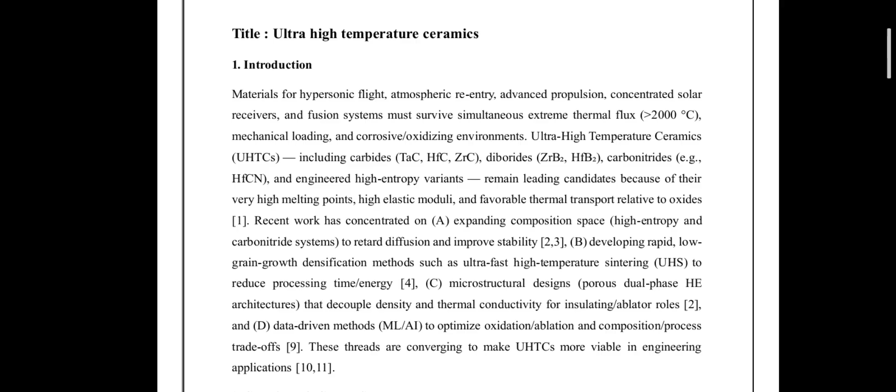Together, these advances are transforming UHTCs from laboratory curiosities into realistic engineering materials with growing relevance for next generation aerospace, energy, and extreme environment systems.

Now we will study the chemistry and crystal structures. So let's start with the chemical bonding.

Ultra high temperature ceramics exhibit a hybrid bonding framework dominated by strong covalent metal-nonmetal bonds between early transition metals and light elements such as carbon, boron, and nitrogen. This covalent bonding is supplemented by partial ionic character and metallic metal-metal interactions, creating a balance between stiffness and transport properties.

The strong directional covalency suppresses atomic diffusion and maintains mechanical rigidity at extreme temperatures, while partial d-band occupation enables moderate electrical and thermal conductivity, unlike conventional oxide ceramics.

When we talk about the electronic structure, density functional theory calculations reveal a pseudo gap in the electronic density of states near the Fermi level for many ultra high temperature ceramics.

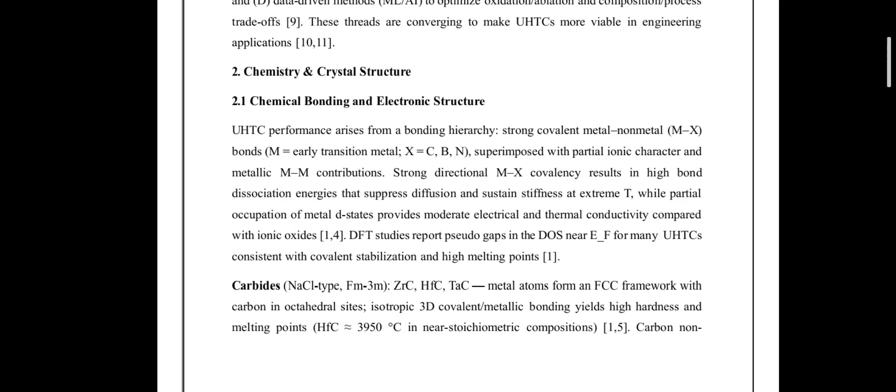These pseudo gaps indicate covalent stabilization and correlate strongly with high melting temperature and thermodynamic stability. This electronic structure explains why ultra high temperature ceramics retain stiffness and phase stability even near 3000 degrees Celsius. Now we will discuss the carbides.

Carbides of transition metals such as zirconium carbide, hafnium carbide, and tantalum carbide crystallize in a cubic NaCl type structure, with the metal atoms forming an FCC lattice and carbon occupying the octahedral interstitial sites of that FCC structure.

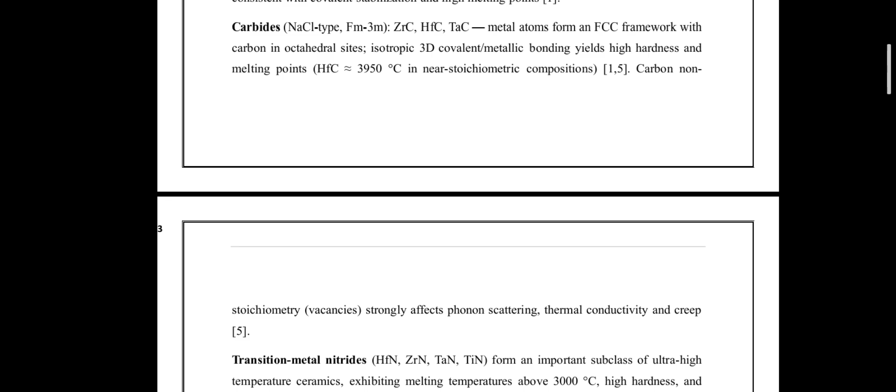This structure produces isotropic three-dimensional bonding, leading to extremely high hardness and melting point, with hafnium carbide approaching 3950 degrees Celsius in nearly stoichiometric composition. However, carbon vacancies are common and strongly influence thermal conductivity, phonon scattering, and high temperature creep behavior.

Second is the transition metal nitrides. These form a related ultra high temperature ceramic subclass with melting temperatures above 3000 degrees Celsius, high elastic moduli, and mixed covalent and ionic bonding.

Compared with carbides, nitrides generally show higher thermal and electrical conductivity and improved thermal shock resistance. Their key limitation is poor oxidation resistance above 1000 to 1200 degrees Celsius, so they are typically used in composite or multi-phase ultra high temperature ceramics.

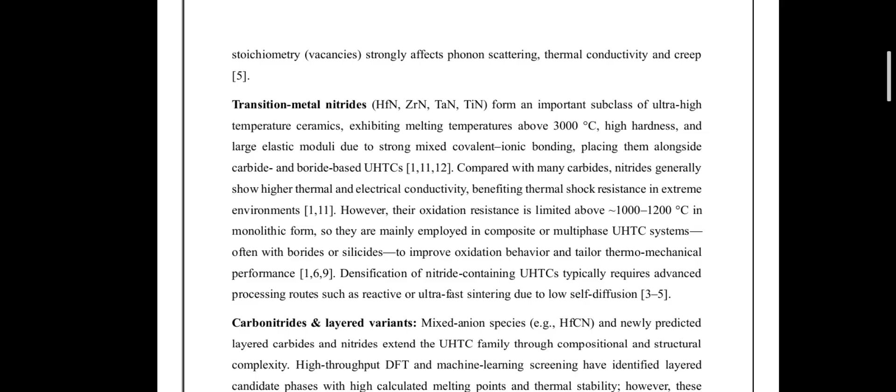Densification of nitride-containing ultra high temperature ceramics requires advanced processing methods due to the extremely low self-diffusion.

Next is carbonitride, an emerging mixed anion system like hafnium carbonitride, which allows tuning of bonding and defect chemistry. High throughput DFT and machine learning studies have predicted layered carbide and nitride phases with high thermal stability. However, most of these remain computational predictions and require experimental validation.

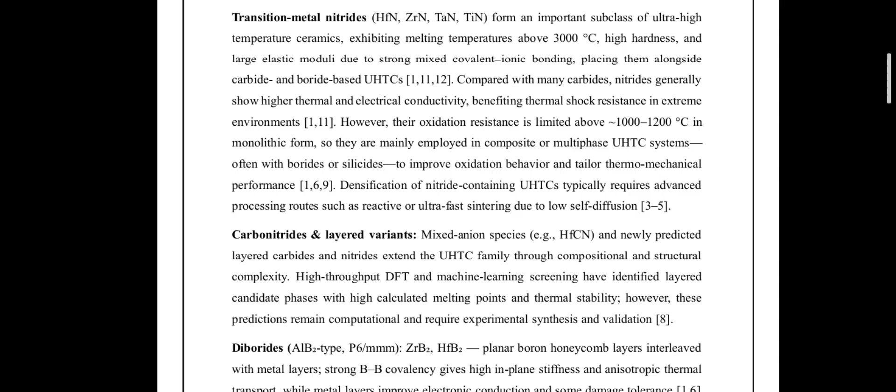The other class is the diborides. The diborides, including zirconium diboride and hafnium diboride, adopt a hexagonal AlB2 type structure consisting of a boron-rich honeycomb layer separated by a metal plane. Strong boron-boron covalent bonding results in very high in-plane stiffness and anisotropic thermal transport, while the metallic layer enhances electronic conductivity. The AlB2 type structure of diboride can be clearly seen in that figure.

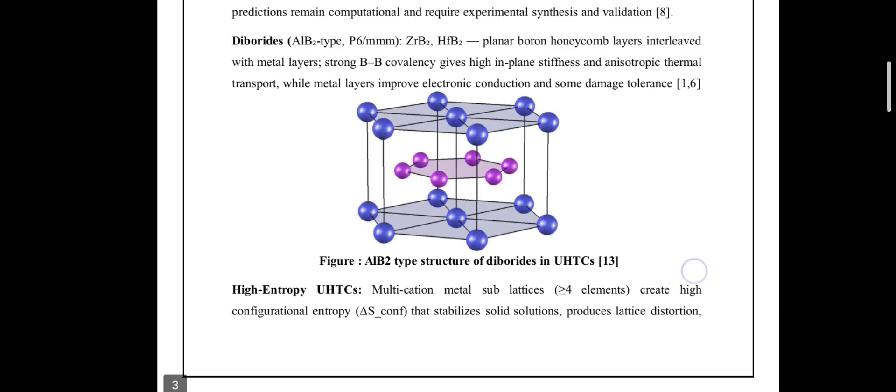Next are the high entropy ultra high temperature ceramics. These incorporate multiple metal cations on a single sublattice, increasing their configurational entropy and disorder. This leads to lattice distortion, suppressed diffusion, and improved phase stability, which can enhance oxidation resistance and grain growth control. Despite their promise, processing and phase stability windows remain challenging in high entropy ultra high temperature ceramics.

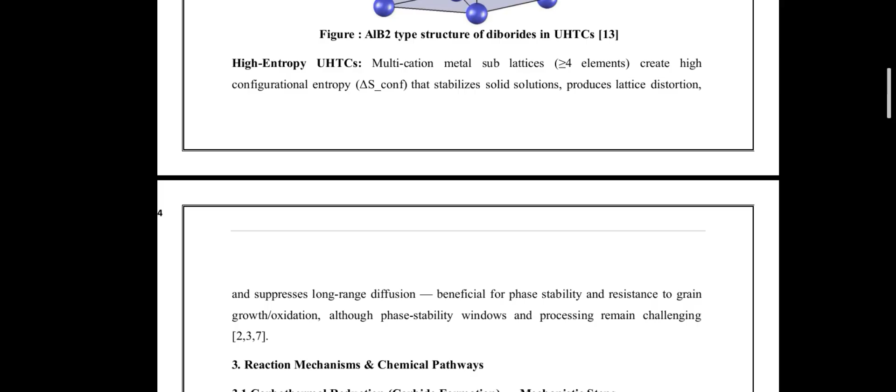Let's move toward the reaction mechanisms and chemical pathways. First is carbothermal reduction carbide formation. Carbothermal reduction is a primary synthesis route for transition metal carbides from oxide at ultra high temperature. The process begins with the adsorption of carbon, either solid carbon or carbon derived from precursors, onto the surface of metal oxide particles.

At elevated temperature, carbon extracts oxygen from the metal oxygen lattice, producing carbon monoxide gas. This removal of oxygen reduces the metal cation, enabling the formation of metal-carbon bonds. The reduced metal atoms then diffuse locally and react with available carbon to form carbide nuclei. As the reaction progresses, these nuclei grow through solid state diffusion and surface reaction. Simultaneously, carbon monoxide gas evolves and escapes.

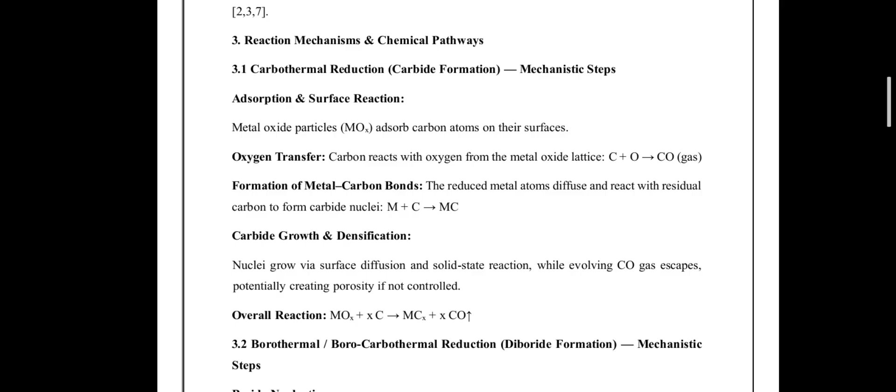If gas evolution is too rapid or diffusion is limited, residual porosity can remain, making atmosphere control and heating rate critical. The overall reaction can be summarized as: metal oxide plus carbon, such that oxygen is eliminated and the metal reacts with carbon to form a metal-carbon bond, while the carbon and oxygen are eliminated as carbon monoxide gas.

Next is the borothermal pathway for the formation of diborides. Metal diborides are commonly synthesized via borothermal or borocarbothermal reduction, typically using boron carbide as a boron source. Initially, the metal oxide reacts with boron to form diboride nuclei, while oxygen is liberated from the oxide lattice. Because boron alone is insufficient to fully remove oxygen, excess carbon plays a critical role, and oxygen is removed as carbon monoxide gas.

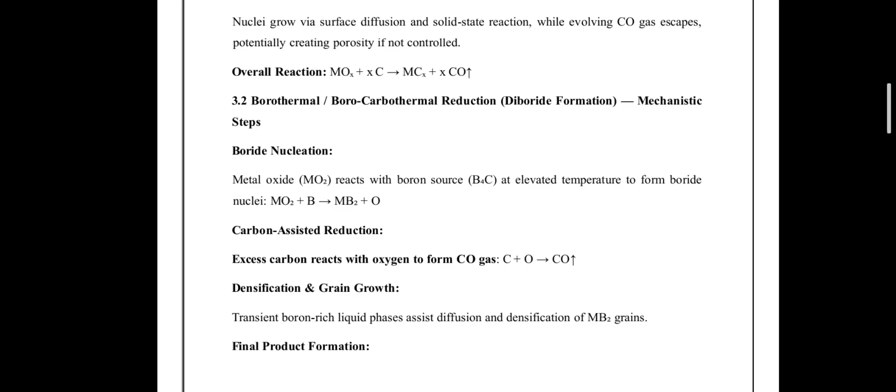At high temperature, a transient boron-rich liquid phase may form, significantly enhancing mass transport. This liquid promotes rapid diffusion, grain rearrangement, and densification of the diboride phase. The final result is dense MB2 grains, with carbon monoxide as the primary gaseous byproduct. The overall reaction is: metal oxide plus boron carbide plus carbon, such that the metal reacts to form the diboride, and carbon monoxide is eliminated as a byproduct. This pathway explains why diboride processing is more sensitive to carbon balance and temperature control than carbide synthesis.

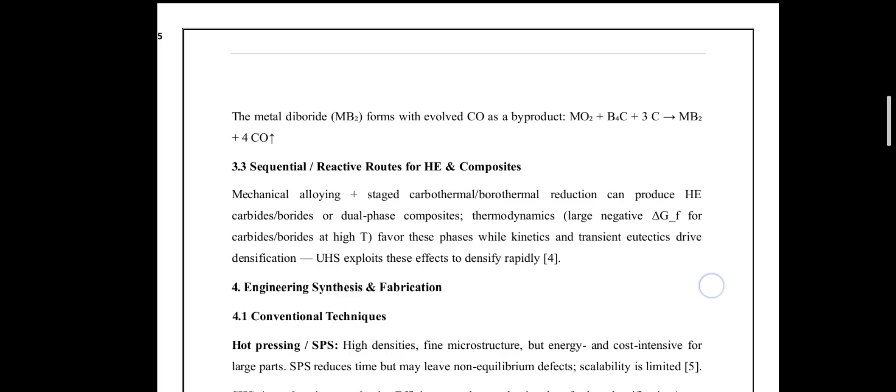Now we move toward reactive routes for high entropy and composite ultra high temperature ceramics, and reactive sequential processing. For high entropy ultra high temperature ceramics and multi-phase composites, a single step reduction is often insufficient. Instead, mechanical alloying is used to homogenize multiple metal oxides, followed by staged carbothermal and borothermal reactions. Thermodynamically, carbides and borides are strongly favored at high temperature due to their large negative Gibbs free energy of formation. However, densification is largely kinetically controlled.

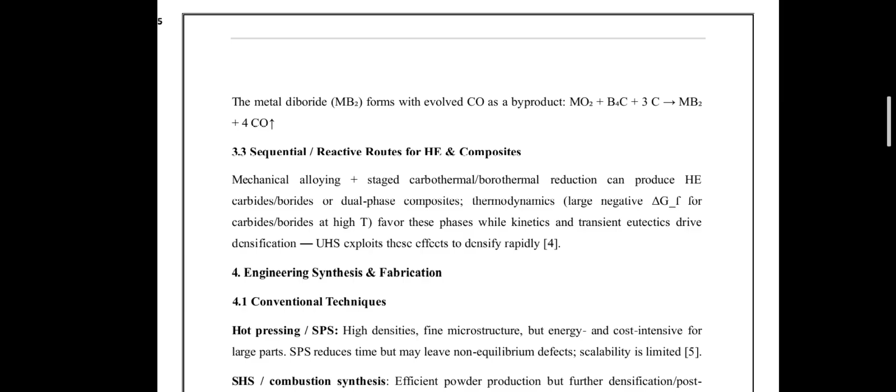Transient eutectic liquid phases accelerate diffusion and reaction rate. Ultra-fast sintering techniques, such as ultra-high heating rate methods, exploit this kinetic effect to achieve near full density before excessive grain growth occurs. After studying the different types, now let's move toward engineering synthesis and fabrication.

First is the conventional processing technique: hot pressing and spark plasma sintering. Both are the most established densification routes for ultra high temperature ceramics, applying simultaneous pressure and high temperature, enabling high relative densities and fine microstructure. Spark plasma sintering significantly reduces processing time due to rapid Joule heating and enhanced diffusion. However, it is energy intensive, expensive, and suffers from limited scalability for large or complex components. In addition, rapid heating can introduce non-equilibrium defects which may affect high temperature stability.

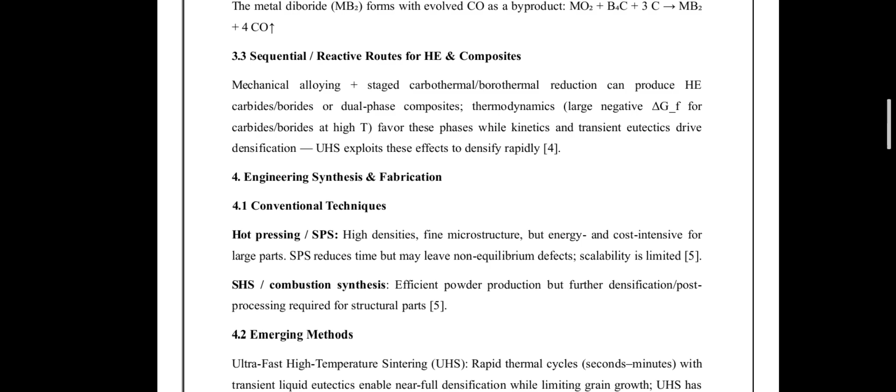Second is combustion synthesis. Self-propagating high temperature synthesis is an efficient route for producing ultra high temperature ceramic powders through highly exothermic reactions. While this offers low external energy input and rapid synthesis, the resulting products are typically porous, inhomogeneous, and require subsequent densification steps such as hot pressing or spark plasma sintering for structured applications.

Those were the conventional methods. Now we will move toward the emerging and advanced processing methods.

Ultra fast high temperature sintering employs extremely rapid thermal cycles, often on the order of seconds to minutes. These conditions promote the formation of transient eutectic or liquid phases, which dramatically enhance diffusion and allow near full densification while suppressing excessive grain growth. Recent studies demonstrate an entropy stabilized diboride composite processed by UHS achieving 90% relative density and nano hardness values approaching 27 GPa, highlighting its potential for advanced ultra high temperature ceramics.

Next is reactive additive manufacturing. This involves printing oxide or polymer derived green bodies which are subsequently converted into carbide or boride via carbothermal or borothermal reactions. Although still at an early development stage, reactive AM offers unique advantages, first, the ability to fabricate complex and graded geometries that are extremely difficult to achieve through conventional sintering routes.

Second is high entropy sequential synthesis. This requires engineered precursor chemistry and staged reduction pathways to achieve homogeneous solid solutions. Sequential synthesis allows control over phase formation, enabling the production of single phase high entropy ceramics or dual phase microstructures with tailored thermomechanical properties.

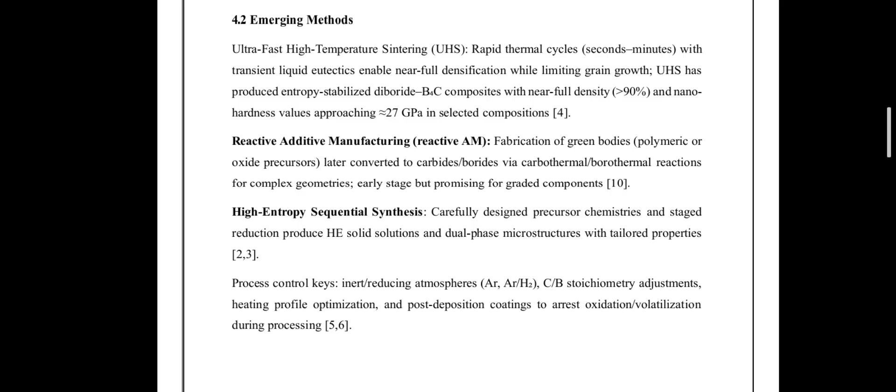Process control considerations we should keep in mind: successful UHT fabrication critically depends upon process control. This includes an inert or mildly reducing atmosphere to suppress oxidation and volatilization, precise carbon and boron stoichiometry to avoid residual oxygen or free carbon, optimized heating profiles to balance densification and grain growth, and protective coatings or sacrificial layers to limit surface degradation during processing.

So these were some fabrication and synthesis routes for ultra high temperature ceramics. Now we will move towards the properties.

First are the mechanical properties, hardness, and elastic response. Ultra high temperature ceramics exhibit exceptionally high hardness and stiffness due to strong covalent metal-nonmetal bonding and dense crystal lattice. For example, hafnium carbide shows hardness in the range of 20 to 30 GPa, while zirconium carbide is slightly lower at 18 to 26 GPa. This hardness originates from directional covalent bonding which strongly resists dislocation motion. Elastic moduli typically exceed 400 GPa.

In diborides, the AlB2 type layered structure leads to pronounced elastic anisotropy. Stiffness is significantly higher in the basal plane than along the C axis, reflecting strong in-plane B-B bonding.

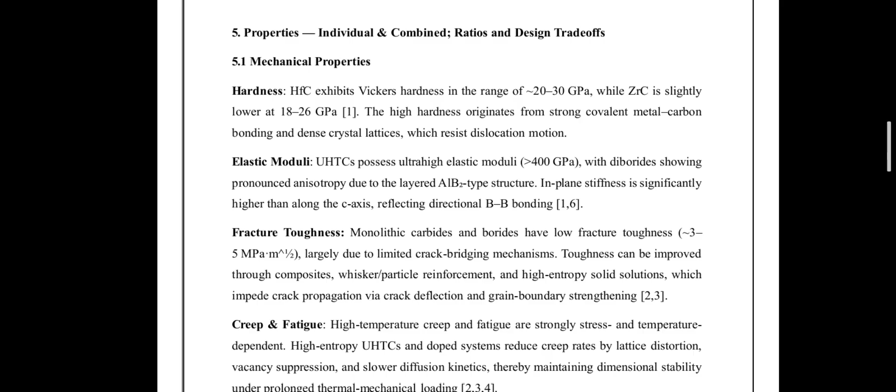Next is fracture toughness. Despite their strength, monolithic carbides and borides suffer from low fracture toughness, typically ranging from 3 to 5. This brittleness arises from limited plasticity and the absence of effective crack bridging mechanisms.

Toughness can be enhanced by composite architectures, such as particle reinforcement and high entropy solid solutions. This approach impedes crack propagation through crack deflection, grain boundary strengthening, and stress redistribution.

Next is creep and fatigue at high temperature. High temperature creep and fatigue are strongly stress and temperature dependent, governed primarily by diffusion controlled mechanisms. High entropy ultra high temperature ceramics show reduced creep rate due to lattice distortion, vacancy suppression, and slower atomic diffusion. As a result, these systems maintain dimensional stability under prolonged thermomechanical loading, which is critical for hypersonic and re-entry environments.

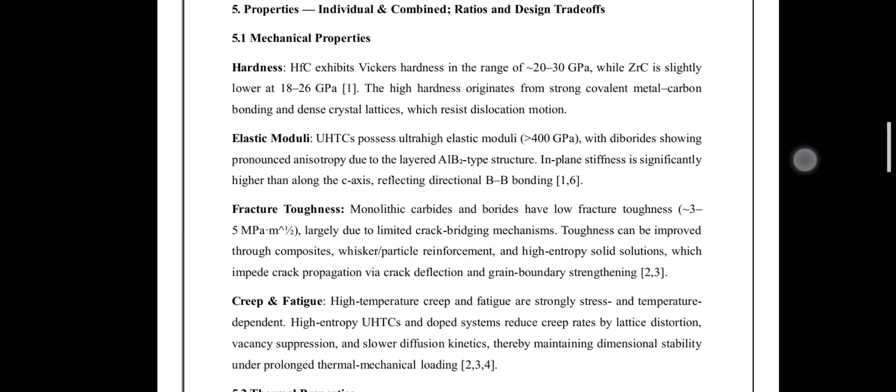Next are the thermal properties: thermal conductivity and anisotropy. Diborides such as zirconium boride and hafnium boride exhibit relatively high thermal conductivity, depending upon purity, porosity, and defect concentration. Their layered crystal structure produces anisotropic heat transport with higher conductivity in the basal plane than along the C axis. Defects, vacancies, and porosity increase phonon scattering, reducing thermal transport efficiency.

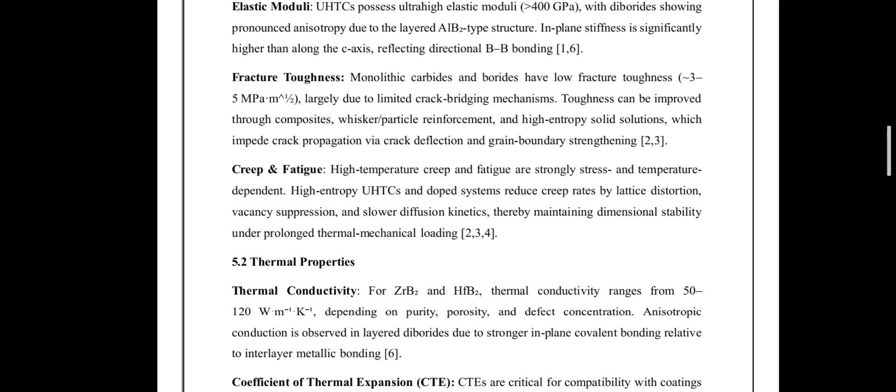Next, the coefficient of thermal expansion is a critical parameter for coating compatibility and structural integrity. Carbides are generally more isotropic, while diborides show moderate anisotropy, and CTE mismatch between ultra high temperature ceramics and substrates or coatings can generate severe thermal stress during heating and cooling cycles.

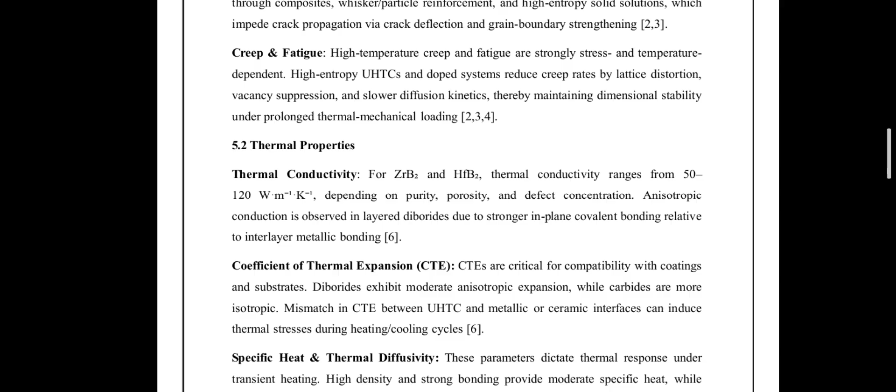Specific heat and thermal diffusivity govern the transient thermal response, while strong bonding yields moderate heat capacities, and defect induced phonon scattering reduces diffusivity, directly impacting thermal protection system performance.

Next is microstructure, the microstructure-property relationships involving grain size, phase, and porosity. Microstructure strongly dictates performance: fine, homogeneous grains enhance hardness and suppress crack initiation, while coarse grains may improve toughness through micro crack deflection. Dual phase and composite systems balance strength, toughness, and thermal conductivity. Porosity reduces modulus and conductivity but can improve thermal shock resistance in ablative and insulating components.

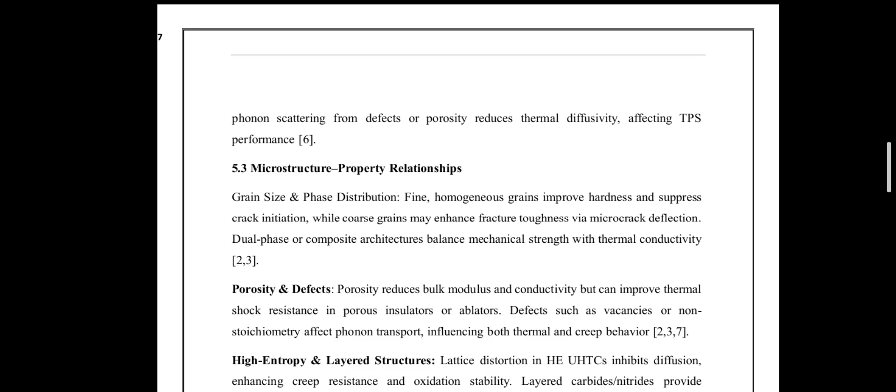Next are the high entropy and the layered structures. In high entropy, ultra high temperature ceramics, lattice distortion inhibits diffusion, improving creep resistance and oxidation stability. Layered carbide and nitride enable directional thermal transport, allowing engineered anisotropy for target high temperature applications.

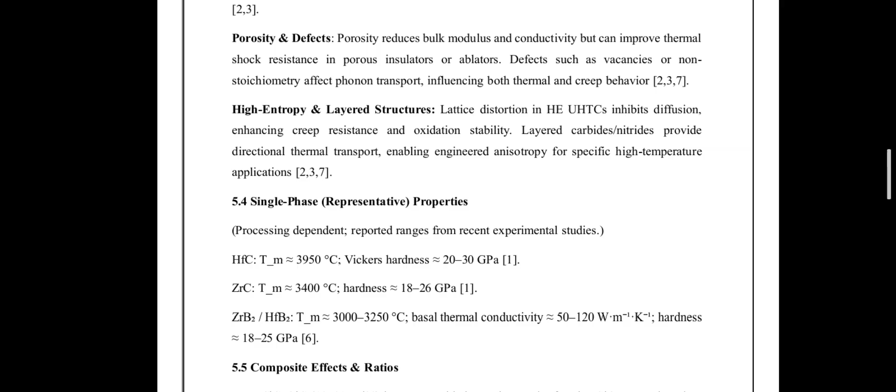Next is their representative single phase properties, processing dependent. There is a reported range. Melting point for hafnium carbide is 3950 degrees and their hardness is 20 to 30 GPa. Melting point for zirconium carbide is 3400 and the hardness is 18 to 26 GPa. For the borides, melting point is 3000 to 3250 degrees Celsius, thermal conductivity ranges from 50 to 120, and hardness 18 to 25 GPa.

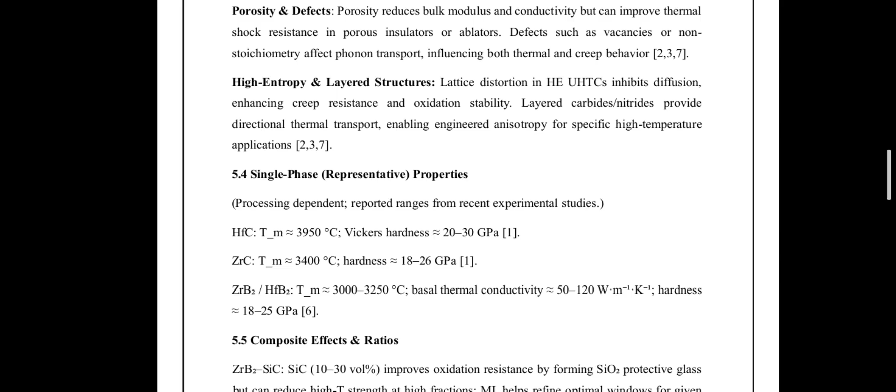Now we will see the composite effect and their design. Composite optimization in zirconium boride silicon carbide composite: silicon carbide addition of 10 to 30% volume improves oxidation resistance by forming a protective silica oxide glass scale. However, excessive silicon carbide can degrade the high temperature strength.

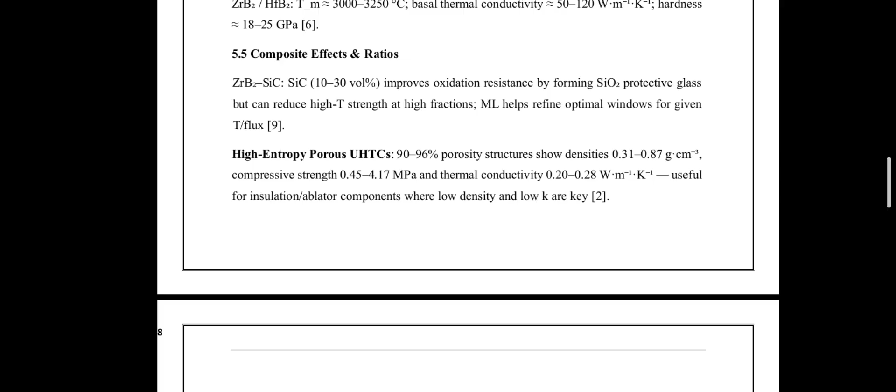Machine learning approaches are increasingly used to identify the optimal composition window for specific thermal and flux conditions. High entropy porous ultra high temperature ceramics exhibit very low density and thermal conductivity, making them suitable for insulation or ablative roles rather than load bearing components.

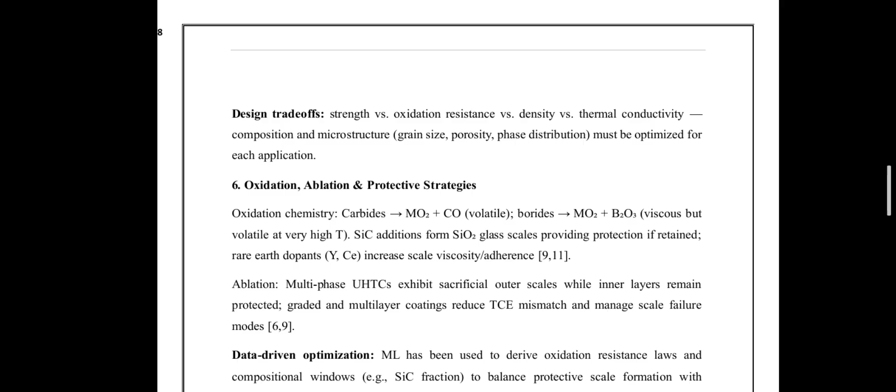Ultra high temperature ceramic design is a multi objective optimization problem: we have to see strength versus toughness, oxidation resistance, and thermal conductivity, density, and thermal protection. These trade-offs are resolved through composition, microstructure, and processing control, increasingly guided by data driven and ML approaches.

The next is oxidation, ablation, and protection. Oxidation behavior is often the ultimate performance limiter. Carbide oxidizes to form carbon monoxide, which is volatile. Boride forms boron oxide glass, which is viscous but volatile at very high temperature.

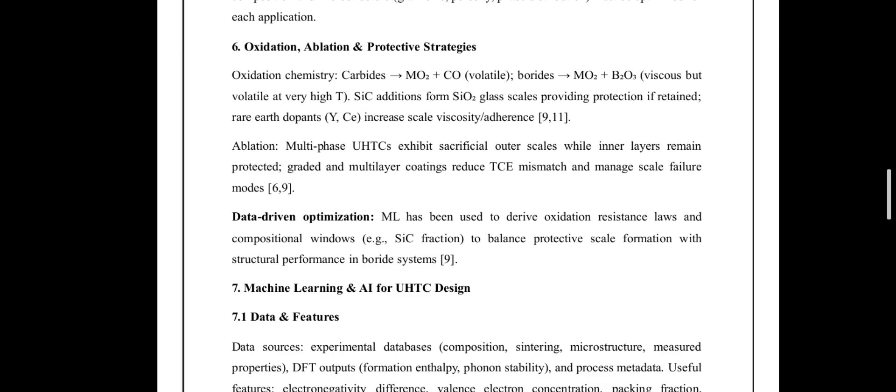Silicon carbide addition generally forms silicon oxide protective scales, while rare earth dopants increase the scale viscosity and adherence. Multi-phase and graded ultra-high temperature ceramics exfoliate the sacrificial outer layer while protecting the load-bearing core.

Next is machine learning and AI for ultra-high temperature ceramics: their data and feature engineering. Modern ultra high temperature ceramic design increasingly relies on data driven approaches to complement experiment and DFT predictions. Key data sources include experimental databases, composition, sintering condition, microstructure, measured properties, DFT outputs: formation enthalpy, phonon stability, elastic constant, and process metadata such as temperature profile, atmosphere, precursor type, etc.

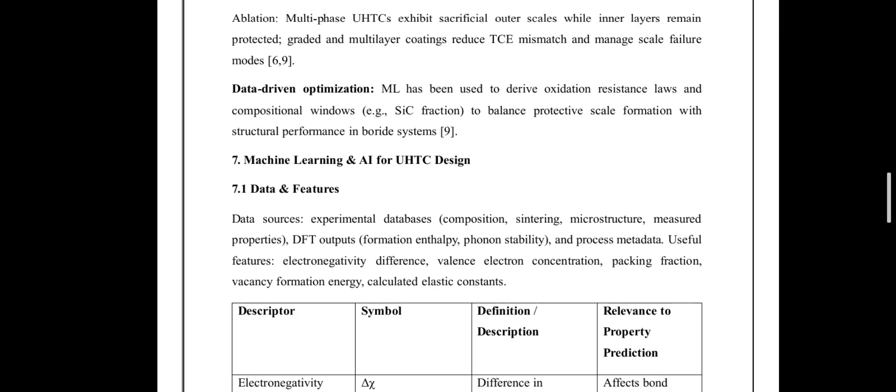The crucial descriptors that we feed into our machine learning for the synthesis and design of ultra high temperature ceramics are as follows. The descriptor involves electronegativity difference, symbol delta chi, which is the difference in electronegativity between the metals and non-metals, and it affects bond strength, oxidation resistance, and thermal stability.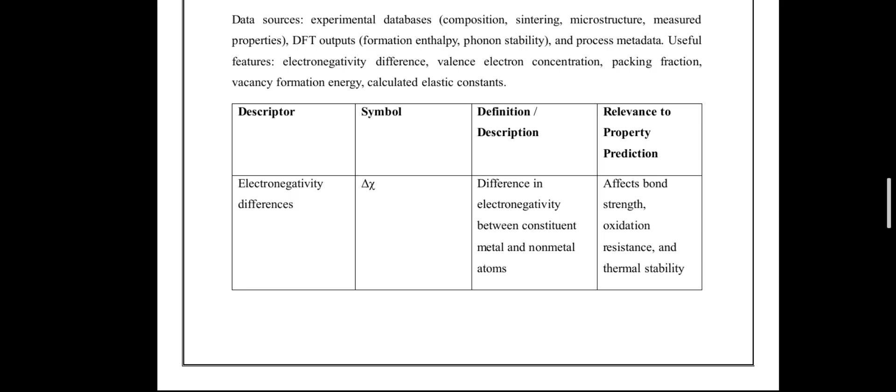Next is the valence electron concentration, represented by VEC, electrons per atom. This is the average number of valence electrons per atom, influencing the electronic structure, hardness, and elastic moduli of our ultra high temperature ceramics.

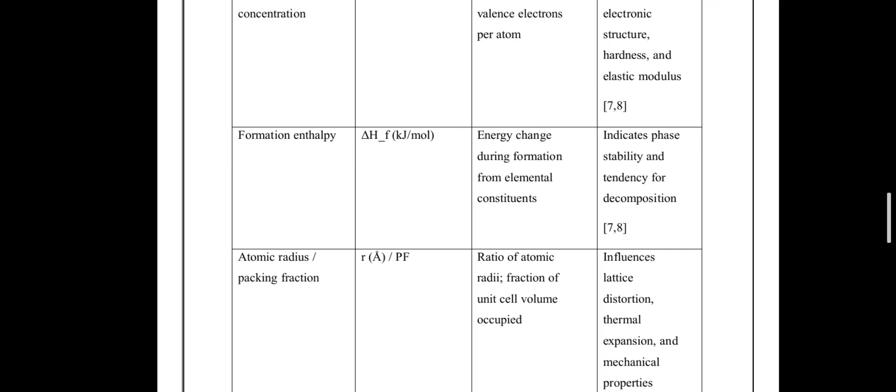Other is formation enthalpy, the energy change during formation from elemental constituents. It indicates phase stability and the tendency for decomposition. Atomic radius, the ratio of atomic radii and fraction of unit cell volume occupied, influences lattice distortion, thermal expansion, and mechanical properties.

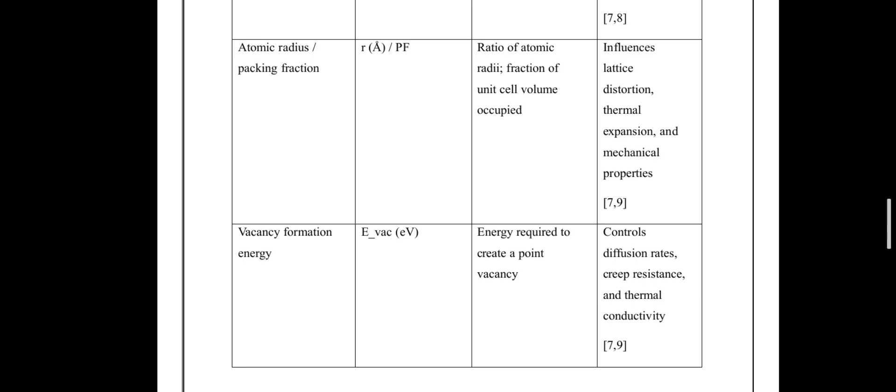Other is vacancy formation energy. It is the energy required to create a point vacancy. It controls diffusion rate, creep resistance, and thermal conductivity.

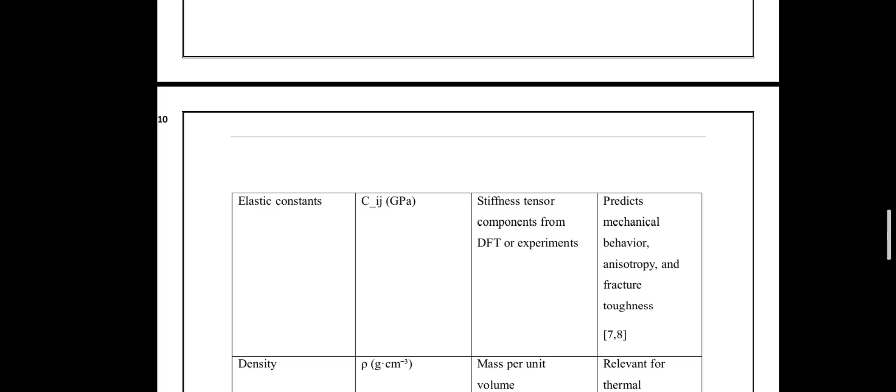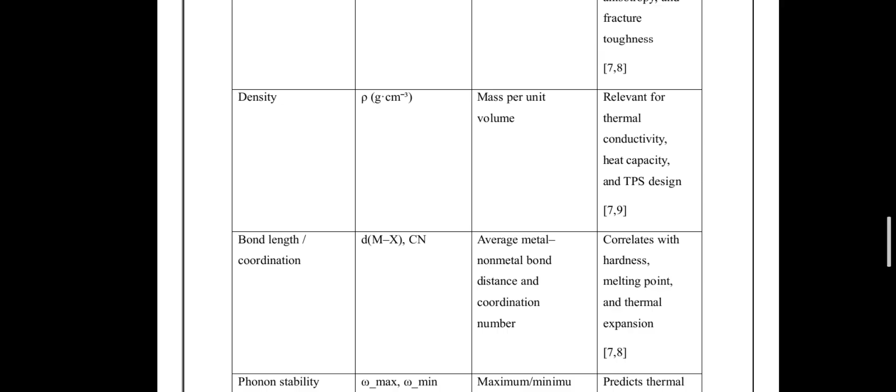Elastic constant tells about the stiffness component from DFT or experiment. It predicts mechanical behavior, anisotropy, and fracture toughness. Density, mass per unit volume, is relevant for thermal conductivity, heat capacity, and TPS design. Bond length and coordination, the average metal-nonmetal bond distance and coordination number, correlate with hardness, melting point, and thermal expansion.

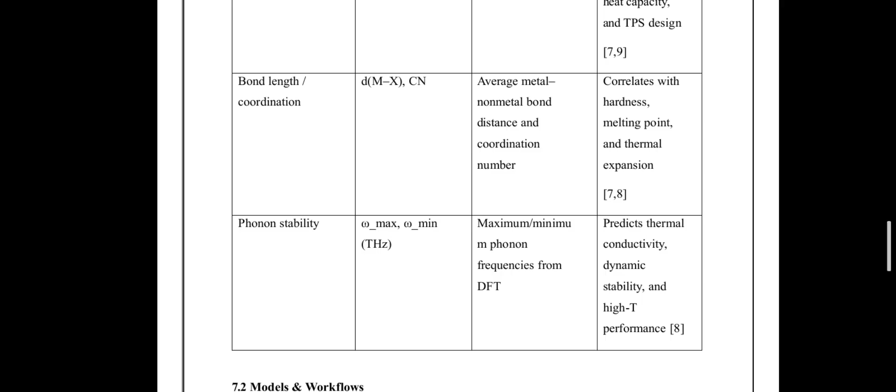Phonon stability, the maximum or minimum phonon frequency from DFT, predicts thermal conductivity, dynamic stability, and high temperature performance. So these are some descriptors that we feed into our machine learning.

Now we will move toward the models and workflows. Supervised machine learning models such as random forest (RF), support vector regression (SVR), and neural networks are widely used to predict oxidation rate, hardness, and thermal and electrical conductivities.

Active learning and Bayesian optimization prioritize experiments that maximize information gain, reducing the number of costly high temperature synthesis trials. ML interatomic potentials accelerate large scale property prediction, such as elasticity and phonons, for candidate compositions, far beyond what DFT alone can achieve.

Their workflow overview is that the typical ML driven design loop includes dataset curation with experimental plus computation data, descriptor engineering to convert chemical and structural features into ML ready input, model training and uncertainty quantification, acquisition selection to identify the most informative experiment or composition, experimental validation through synthesis and testing candidates, and dataset update to incorporate new results to improve our models.

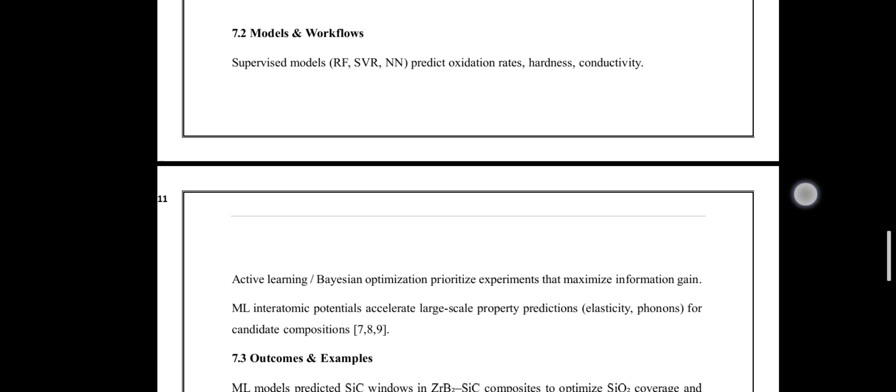For zirconium boride silicon carbide composites, the ML predicts the optimal silicon carbide fraction to form protective silicon oxide glass scales while maintaining mechanical strength, achieving R2 of 0.8 to 0.9 on curated test sets.

The layered carbide and nitride combined DFT plus ML screening proposed dozens of candidate phases with predicted Tm over 2500K ready for experimental validation. These examples demonstrate that ML accelerates discovery, identifies composition-property relationships, and helps navigate the vast UHTC design space much faster than trial and error experiments.

So machine learning in UHTCs is not just about prediction, it is a design tool linking bonding, structure, and processing to high temperature performance. By combining computational machine learning and experiment, researchers can reduce the trial and error effort, optimize multiple objective properties, and explore complex systems like high entropy and layered ultra high temperature ceramics and high entropy composites.

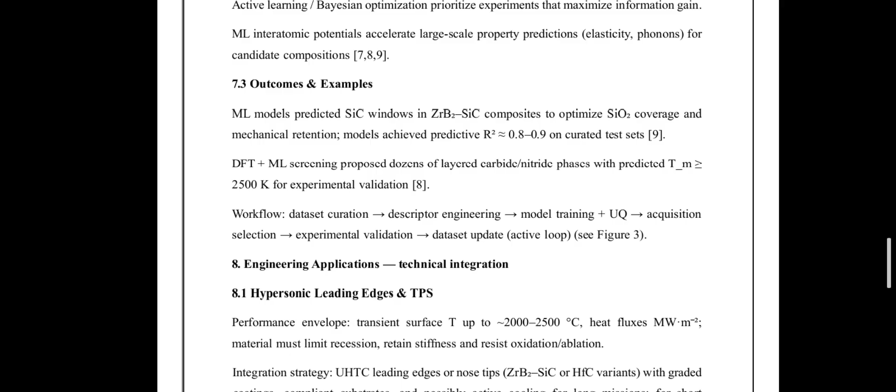Now we will discuss the engineering applications of ultra high temperature ceramics. First is hypersonic leading edge and thermal protection systems.

So what will be their performance involved? The transient surface temperature up to 2000 to 2500 degrees Celsius, heat flux in the MW per meter squared range. Material must resist recession, retain their stiffness, and withstand oxidation and ablation. So these are the requirements needed at a hypersonic leading edge.

So the integration strategies: the leading edge and nose tips made from zirconium diboride silicon carbide and hafnium carbide composite. Use of graded coating to manage oxidation and thermal expansion, compliant substrates to reduce thermal stress, optional active cooling for extended missions, and sacrificial layer surfaces for short duration flight.

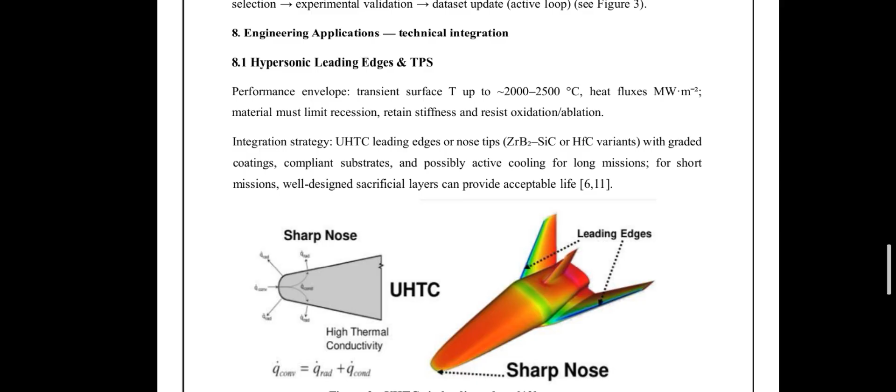Next we will study the energy systems, concentrated solar systems, and nuclear, where ultra high temperature ceramics are used. Ultra high temperature ceramics allow receivers to reach higher temperatures, improving thermodynamic cycle efficiency.

And in fusion reactors, ultra high temperature ceramics are under evaluation for plasma facing and high temperature structural components. The key concerns are neutron irradiation tolerance, long term corrosion, and thermomechanical reliability.

Lightweight insulation and ablators: the porous high entropy ultra high temperature ceramics provide ultra light thermal insulation with usable compressive strength, ideal for low mass TPS panels or thermal insulation inserts where the structural loads are moderate.

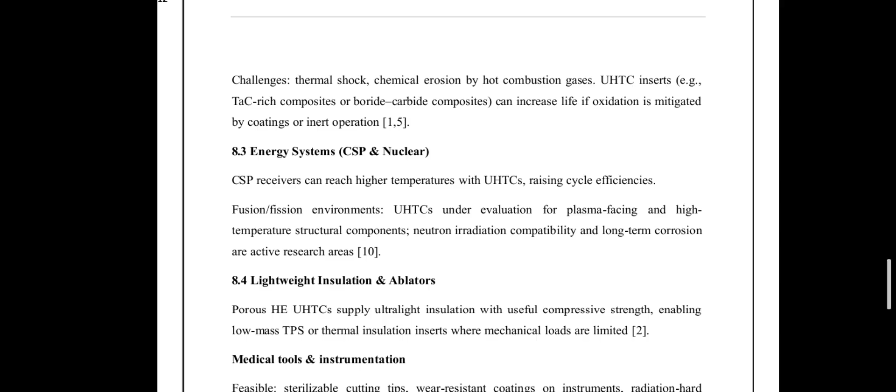We can also use ultra high temperature ceramics in medical tools and instrumentation. Feasible applications where they can be used are sterilizable cutting tips, wear resistance coating, and radiation hard apertures.

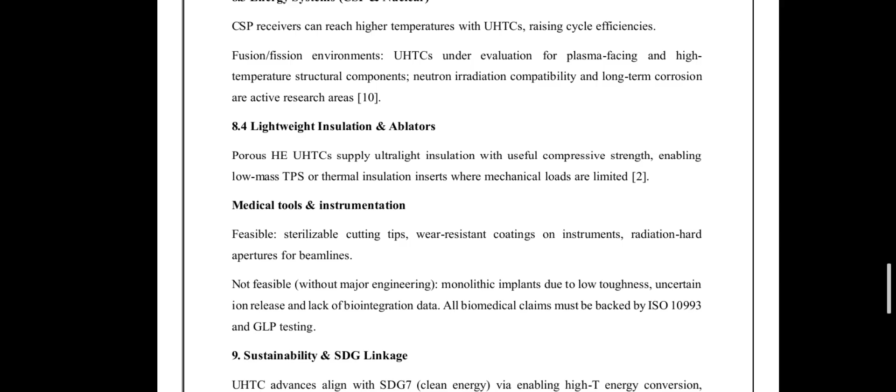Not feasible without engineering are monolithic implants, due to their low toughness, ion release concerns, and uncertain biointegration. So compliance with ISO 10993 and GLP testing is mandatory for any biomedical development. They have to pass through that testing before they're used in the medical field.

Now we will link ultra high temperature ceramics with the SDGs. SDG 7 is affordable and clean energy, focusing on ensuring access to affordable, reliable, and sustainable modern energy. Ultra high temperature ceramics contribute to this goal by enabling energy systems to operate at significantly higher temperatures than conventional materials.

In concentrated solar power plants and next generation nuclear and fusion reactors, efficiency increases as operating temperature increases. UHTCs retain mechanical strength, oxidation resistance, and thermal stability at temperatures where metals and conventional ceramics fail. By allowing higher operating temperatures, UHTCs improve thermodynamic efficiency, reduce energy losses, and lower the overall cost per unit of clean energy produced. This directly supports the transition away from fossil fuels.

Next is SDG 9, industry innovation and infrastructure. SDG 9 emphasizes resilient infrastructure and technological innovation.

UHTCs are critical enablers of advanced aerospace, hypersonic transport, and high temperature industrial systems. In hypersonic vehicles and reusable spacecraft, UHTCs withstand extreme aerodynamic heating and mechanical stress. This durability allows for reusable systems, reducing material waste and launch cost while strengthening technological infrastructure. Additionally, UHTCs support innovation in industry processes by enabling cleaner, more efficient high temperature manufacturing with reduced contamination and longer component life.

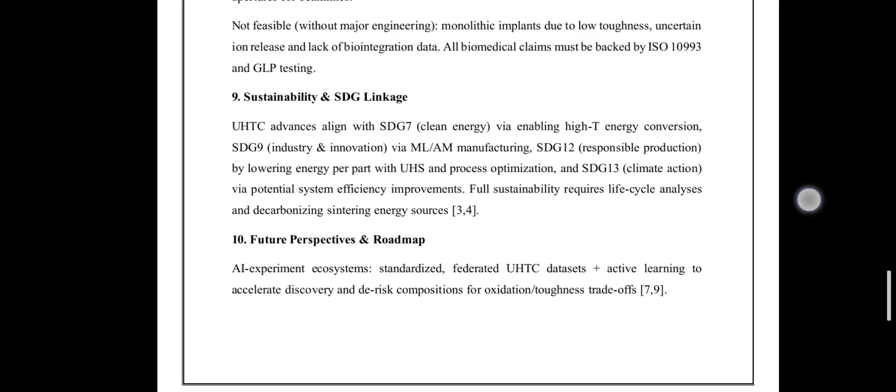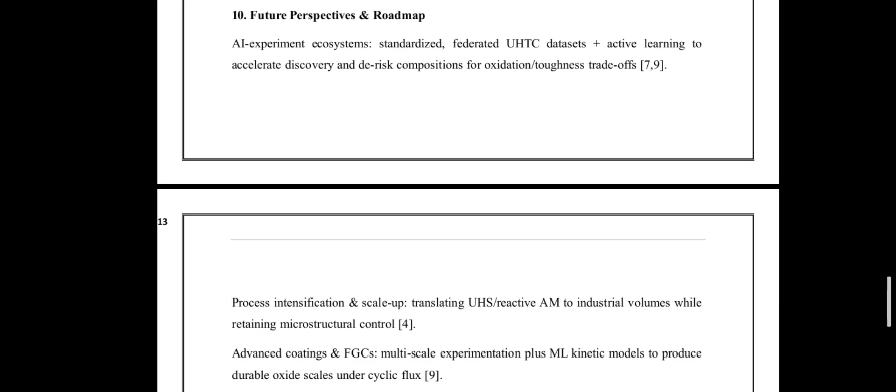Now we will move toward future perspectives and roadmaps. An AI experiment ecosystem, federated UHTC datasets plus active learning, to accelerate discovery and optimize oxidation-toughness trade-offs. Then process intensification and scale up, translating UHS and reactive AM to industrial scales while preserving microstructure. Advanced coatings and functionally graded composites, FGCs, multi-scale testing, plus ML kinetic models to design durable oxide scales under cyclic thermal flux. And last is non-equimolar high entropy design, expanding the meta-stable composition space to tune properties beyond the equimolar approach.

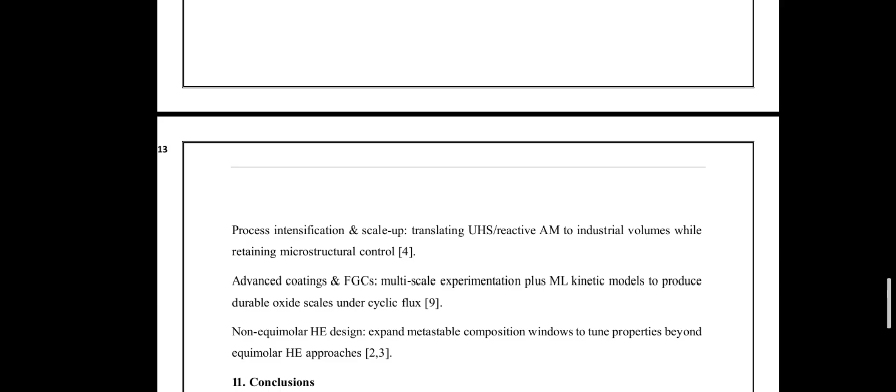There are also some recommendation areas we need to focus on: improving oxidation resistance, protective coatings and self-healing layers, mechanical and thermal shock toughness and lightweight design, porosity control, manufacturing using additive and advanced sintering, property control focusing on tunable thermal and electrical behavior, multifunctional systems, modeling with the help of AI and predictive simulation, and application integration through real system testing and certification. These fields also need focus. Last, there is a conclusion for ultra high temperature ceramics.

Recent 2022 to 2025 advances in high entropy chemistries, UHS processing, porous dual phase architecture, and ML guided optimization materially improve UHTC's prospects for engineered deployment. Remaining major challenges are oxidation protection, fracture toughness, scalable energy efficient manufacturing, and integration of chemical design and processing science. AI tools are the fastest route to robust, deployable UHTC systems.

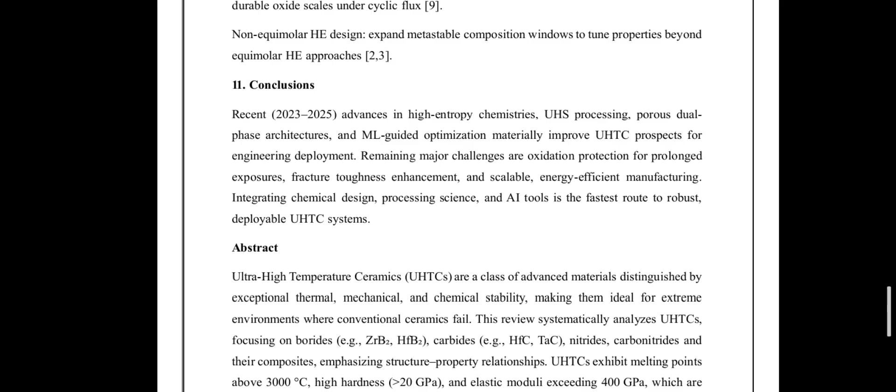In the end, there is an abstract summarizing my whole presentation. Ultra high temperature ceramics are a class of advanced materials distinguished by their exceptional thermomechanical and chemical stability, making them ideal for extreme environments where conventional ceramics fail. They involve borides, carbides, nitrides, carbonitrides, and their composites. They have high hardness and high elastic moduli, which are outcomes of strong covalent metal-nonmetal bonding.

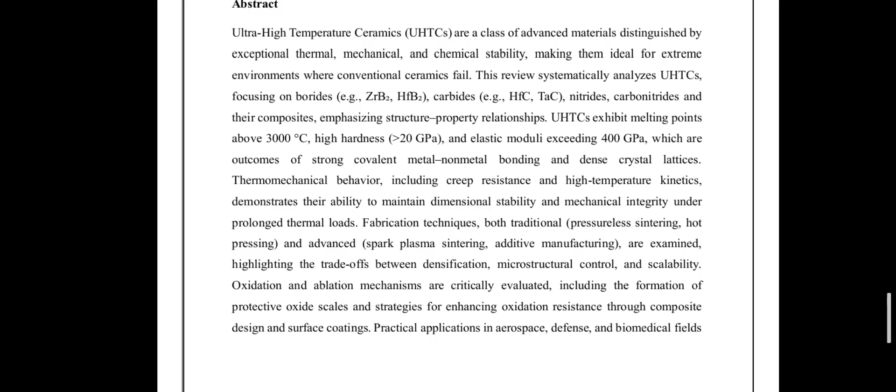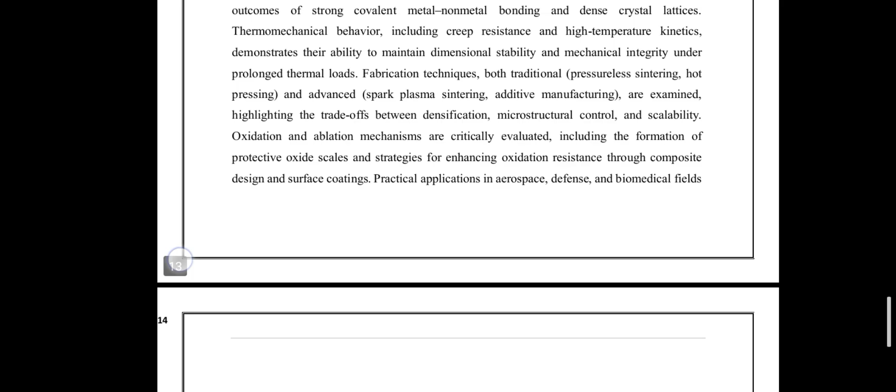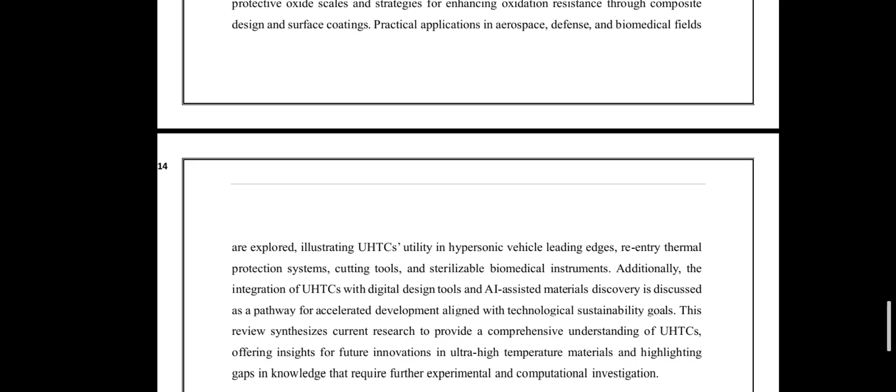We also discussed different fabrication techniques, their microstructure control, oxidation and ablation behavior, and their practical applications in aerospace, defense, and biomedical fields. We also studied their integration with AI-assisted materials, their link with sustainability goals, and this review synthesizes current research to provide comprehensive understanding of ultra high temperature ceramics, offering insight for future innovation in ultra high temperature materials, and it also highlights gaps in knowledge that require further experimental and computational investigation.